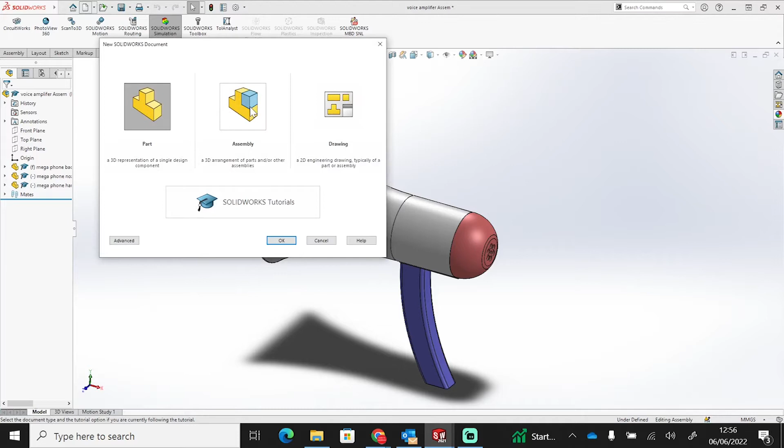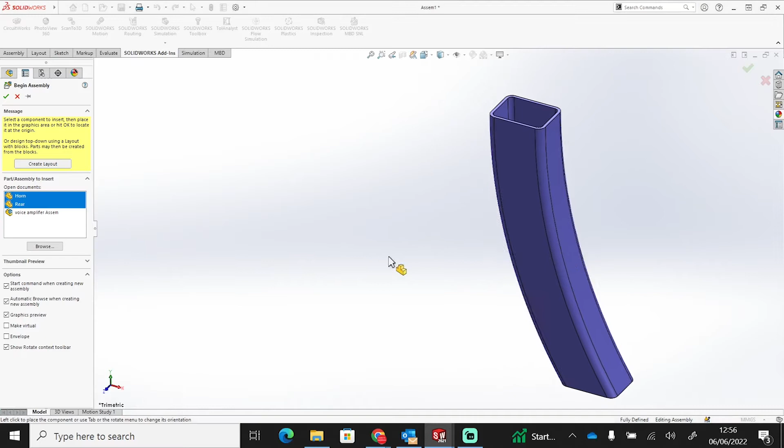So what we're going to do is, rather than create a part, we're going to create an assembly for this model. So go to Assembly and OK. What you'll get here down the side is all of the components that we have created. So I'm just going to grab these. Click on one, hold Control, click on the ones that we want. So we've got the handle, the horn, and the rear. I've got them all highlighted by holding Control and clicking on each one at a time. I'm going to move across, and I'm just going to drop them in one by one, like so.

Now, what you'll see down the side is we've got our three parts. One of these parts, as you can see here, is the handle that has a little F next to it. So that is our fixed component. Now, whether we want that to be our fixed component or not is a different matter, but that is our fixed component. For the sake of this model, it doesn't matter which one we have as our fixed component. Let's have the handle as the fixed component.

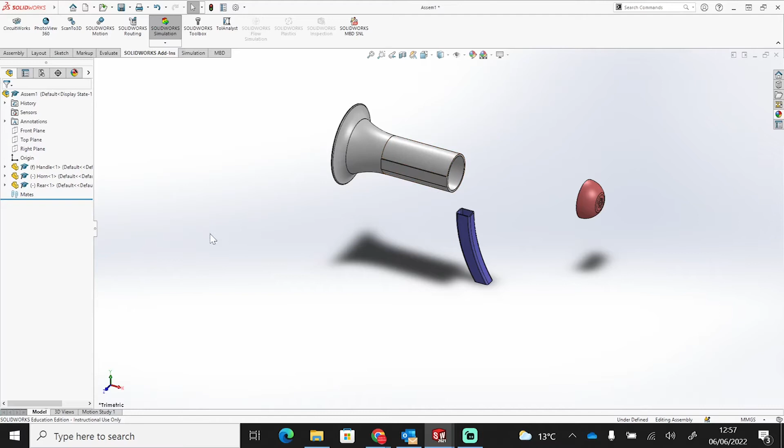But if we did want to change that, we could right-click on it, select Float. It will now move around. If I right-click on it again and go Fix, it'll be static, and if I grab it, I can't move it around, but I can move the other components around. Okay, so just need to make sure that I'm happy with the component that is fixed, because that's what everything's going to be attaching to. So for instance, the horn and the end are going to be held in place by being attached to the handle. So let's have a look at how we go about doing that.

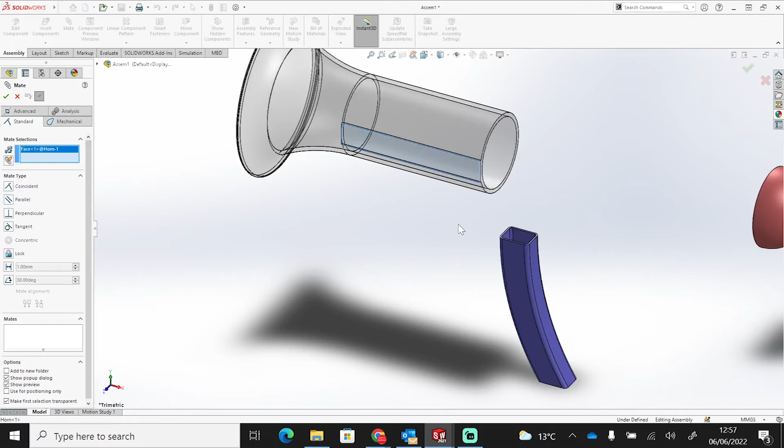So first of all, let's attach the horn to the handle. So if I go to my tabs, I should have an assembly option. I'm going to go to Mate, and I'm going to click on this flat strip underneath the horn. And I'm also going to click on the top face of my handle. That should start to line them up. So we can see there that they have lined up. Now, I also want this outside edge of this flat strip to line up with the outside edge of the handle, and it'll just move it across like so.

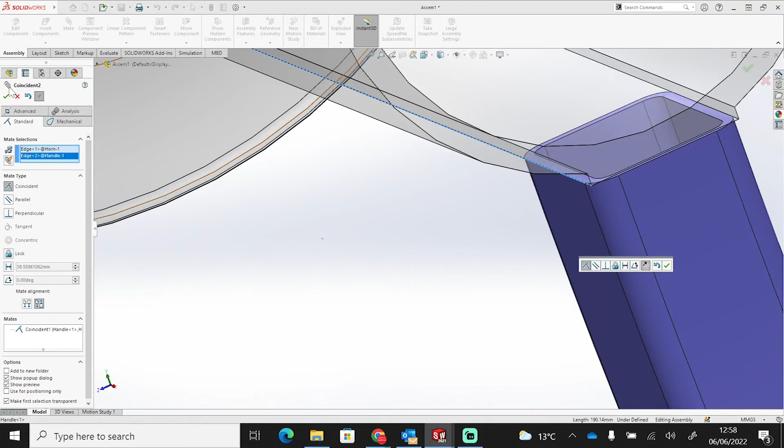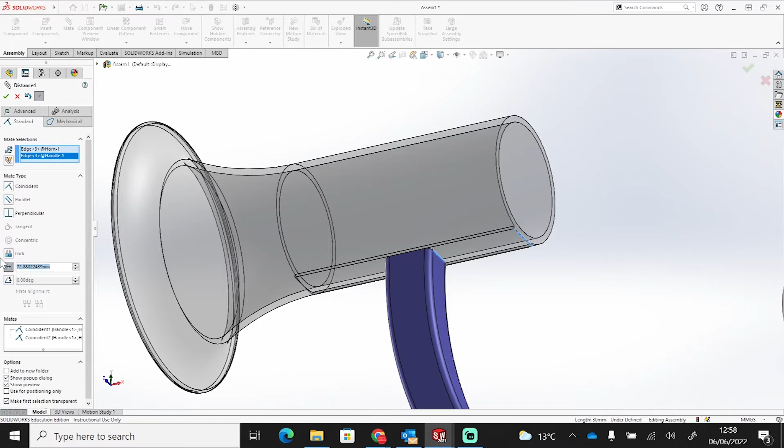Okay, now that's still going to move, so if I grab this, it will still move backwards and forwards. So let's roughly say that I want this edge here to line up with this edge here. Now, I want to set a distance, because I don't want it to line up right at this back corner. Let's say we want it 75. That just positions the handle roughly in the center of that flat section. Okay. Then a tick to show that I'm happy, and that's all set up. This component is now fixed to here. It can't move. I can prove that by grabbing this and dragging it around; it doesn't go anywhere.

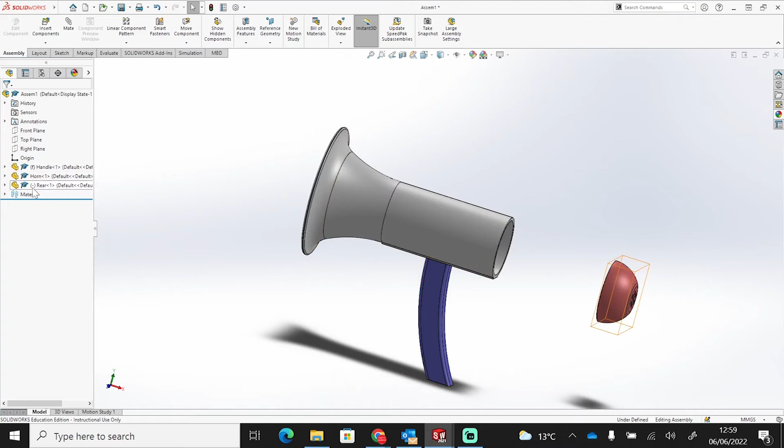It also shows, because if we look at our list of components in the design tree here, the rear component still has a little negative sign in brackets, which means I can still move it around. The horn does not, so that means it is fully defined. It does not have that.

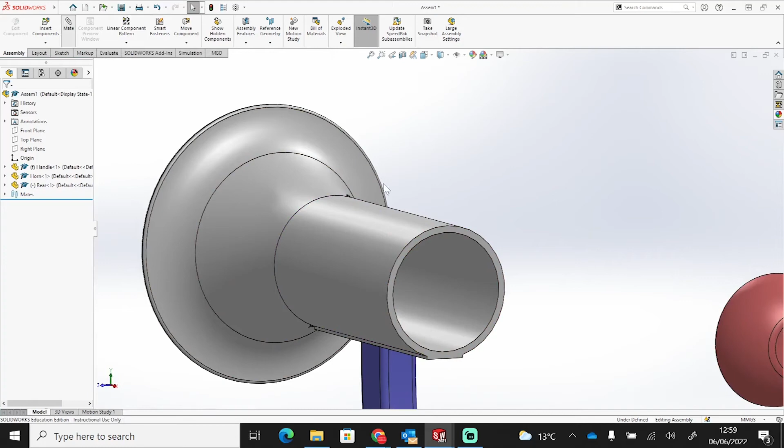Okay, so let's do the same to the end on here. We want to mate this to the end of our horn. So I'm going to go to Mate, I'm going to select this face, and I'm going to select this face here. That will just line them up. Okay. Then I'm going to select the outside circle, and I'm going to select the outside circle there as well. And that will just link them together. Okay, and exit.

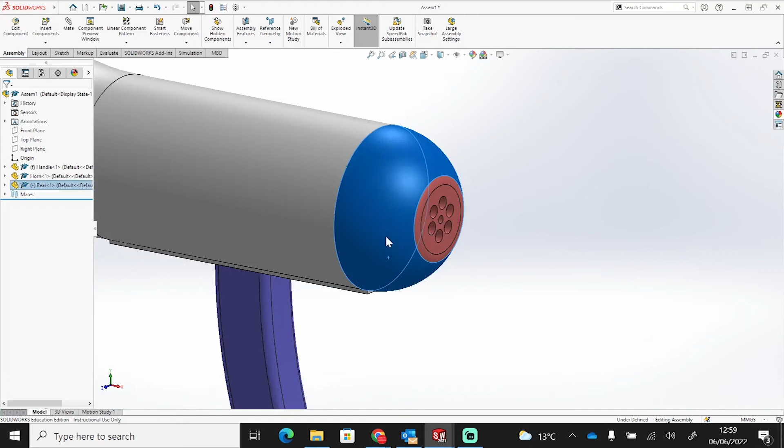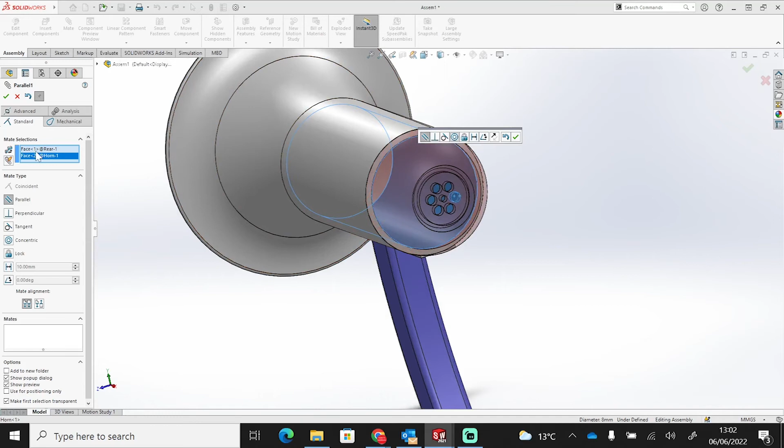Now you'll still see there's a little negative on the rear, because it will still turn. We don't want it to rotate, so we're going to lock this in place. So if I go to Mate, I'm just going to click the inside of one of them circles, and I'm going to go through the circle and click the inside of the horn itself; that'll give me two things that I can lock together. So click the lock there, tick, and what we'll see now is that this won't move. Excuse me. And if I exit that, the minus has now gone on the rear. So it's locked in place.

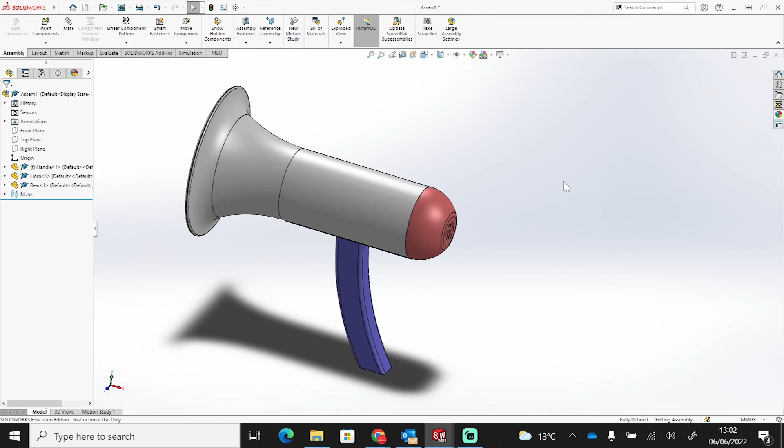And that means that our assembly is now completed for this voice amplifier, leaving us with a final product completed. If you want to see this in a realistic view, we can go to Add-ins, we can go to PhotoView 360. That will add in the render tools, and I like the integrated preview option, so if we go to integrated preview, zoom in, make it centered on the page.

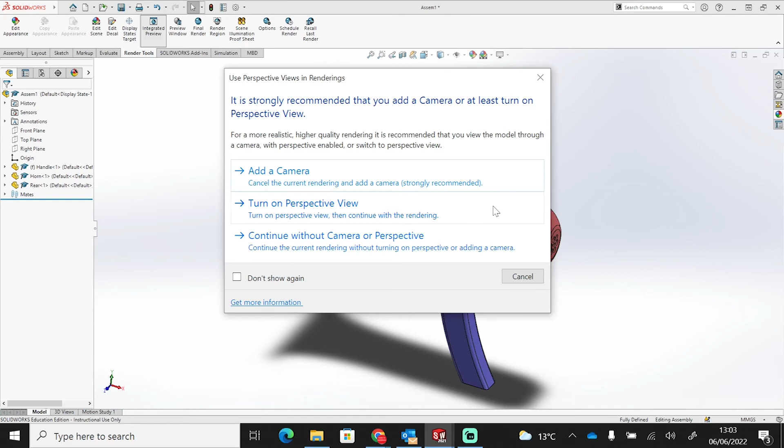We can add a camera if we want, or continue without. It's completely up to you. I'm just going to continue without because it's on the screen how I want it to look. If I wanted to add a camera to show a specific angle off, I could. Continue without, and you'll see in a moment that it will render that live on the screen. And there we go. We have our finished rendered product on our screen, and what it will look like in terms of the ABS with the three different colors. So that's what your finished voice amplifier rendered would look like.

So if you wanted that as an image, you could export that image. But yeah, there you go. That's the finished product. So hope you enjoyed that. Hopefully you took something away from modeling that product, those three different steps, three different videos.